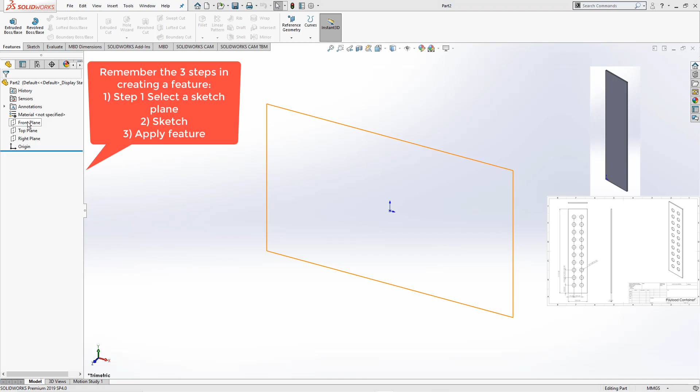Select a plane, normal to, sketch a rectangle out, make sure you sketch it on the origin.

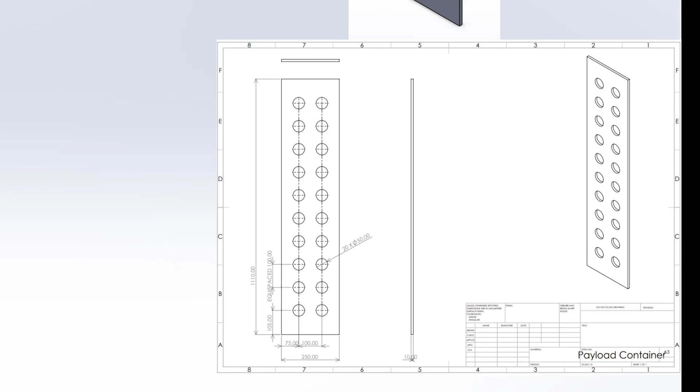Smart dimension the rectangle following the dimensions shown here. The thickness of the part will be 10 millimeters, the width will be 250 millimeters, and the total length of the part here will be 1110 millimeters.

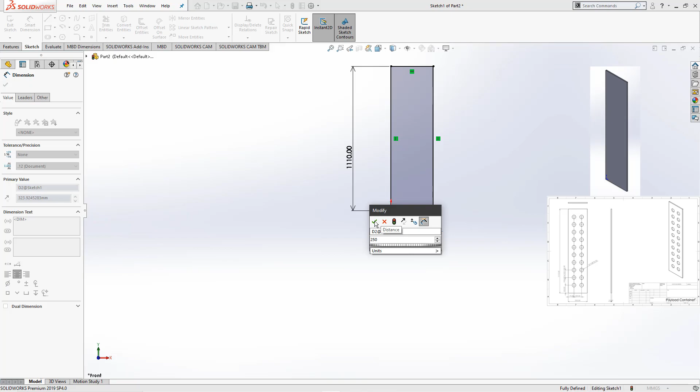So smart dimension, 250, and when you're done, hit the tick button. Accept.

Next, go to the Features tab, select Extrude Boss Base, and when it asks you to select a sketch, click the arrow button here, select Sketch 1.

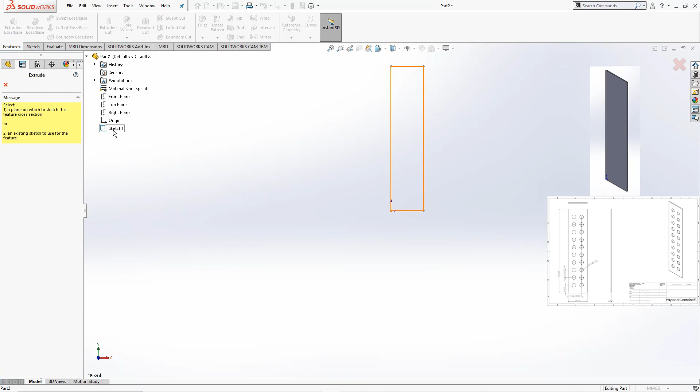By default, for mine the thickness is 10 millimeters. If yours is not 10 millimeters, make sure you change this to 10 millimeters. Select Blind, the default setting, and hit the tick button.

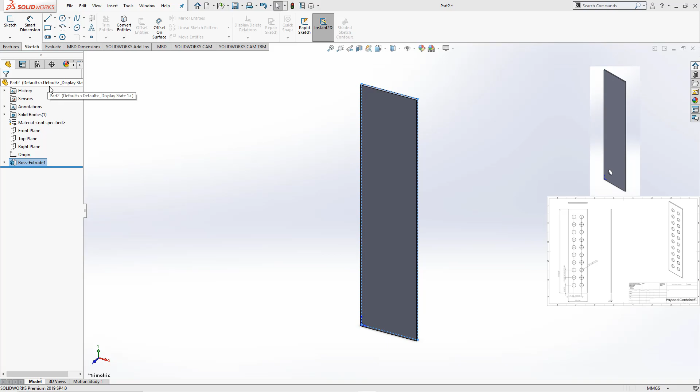For our next step, you'll like to create a hole on the part here. So what I'm going to do is select the surface of the part as the new sketch plane, right click, normal to, so that your surface faces you perpendicularly.

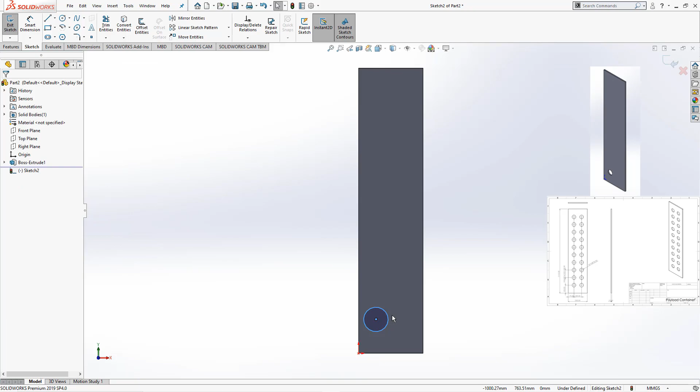Go back to sketch, select a circle, sketch the circle, hit the tick button, and smart dimension the circle following the dimension shown here.

First, let's set the diameter of the circle as 50 millimeters. The depth of the circle from the edge of the part is given as 105 millimeters.

The distance of the circle from the middle of the circle to the left edge of the part is given as 75 millimeters. Hit enter. Click on the tick button when you're done.

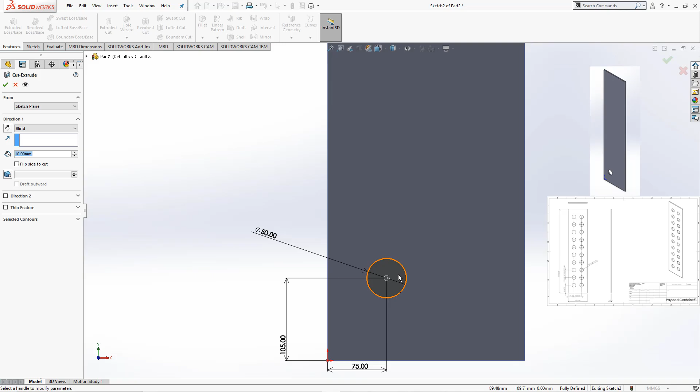Next, go to Features, Extrude Cut. Okay. This panel here pops up.

Just like the extrude feature, this setting here by default is set as blind. Blind allows you to control the depth of the cut that you want. For example, if I were to rotate this image here, you can see a preview of the depth of this cut if it's set at 10 millimeters.

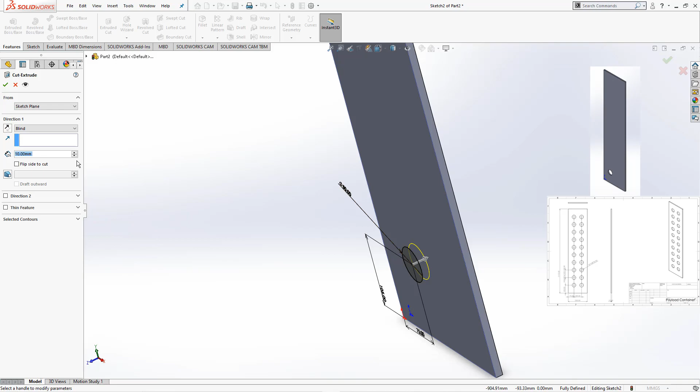If I set it to 5 millimeters, the depth is now shallower here. So blind allows you to select the depth by which you can select how deep you want your hole to be cut. But in this case, we want the hole to go through the entire part, the entire board.

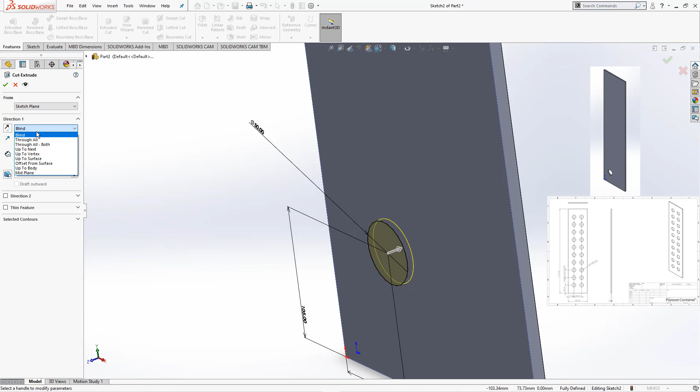So what we're going to do is, instead of selecting blind, click on this arrow here, select through all. What it does is that it will cut a hole all the way through. Alright, and when you're satisfied, hit the tick button here.

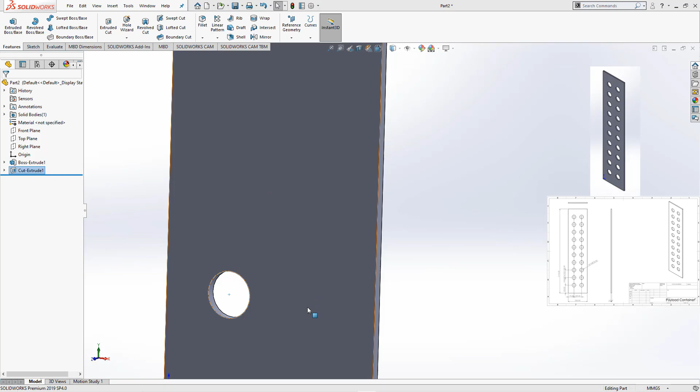If you look at the detailed drawing here, you will notice we need to sketch 19 more circles and extrude cut 19 more holes. We can repeat the process of sketching each circle one by one and then extrude cut. However, let's be more efficient, especially when creating parts.

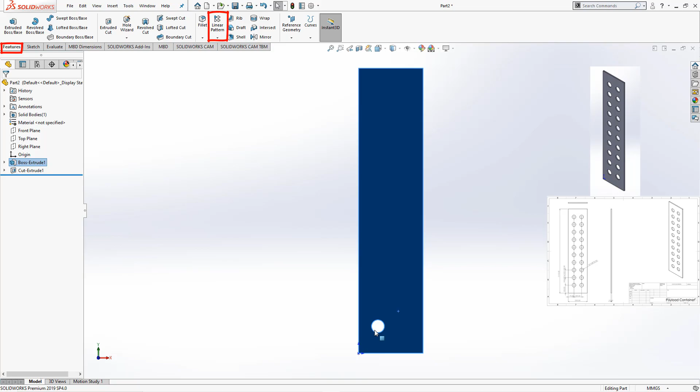I'm going to normal this part to my screen. Under features, there is something called linear pattern, and linear pattern will allow you to actually copy the holes in a linear pattern so that you don't have to create each hole one by one.

Click on linear pattern. This panel here pops up. You'll notice that there's a direction 1 and direction 2. This allows you to copy the linear pattern in two different directions.

For example, I want to copy this hole here in the X direction and also in the vertical direction, or the Y direction. So let's start with the X direction.

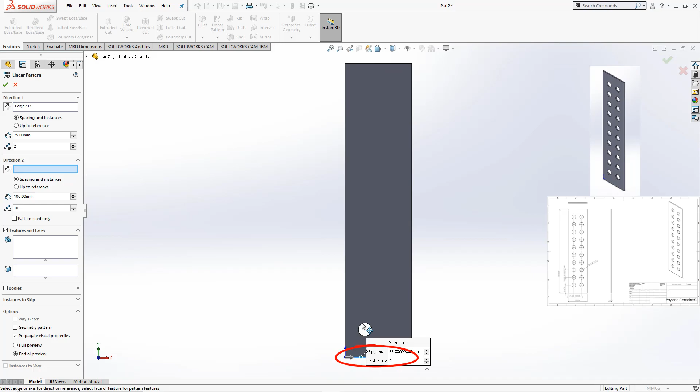So select on this box here, to indicate which direction I want it to be patterned. So I'm going to select on this edge. It could be this edge as well, but let's select this one here. Alright, this allows the hole to follow parallel to this edge here.

And the next one here, the gap in between each hole, just have to follow the detail drawing dimension shown here, which is 100 millimeters. I need two holes. Okay, so by default mine is selected as 2.

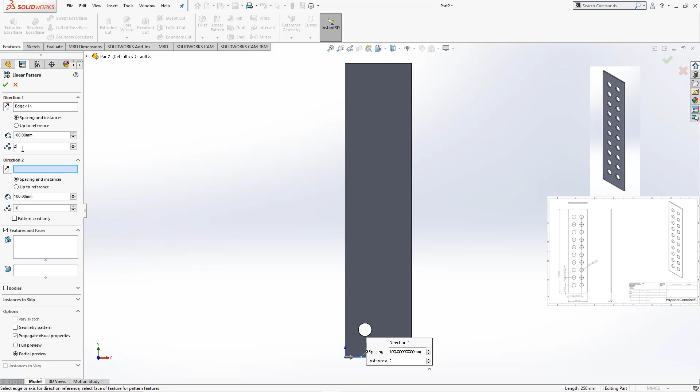For the next one, for direction 2, we want to copy in the Y direction or in the vertical direction. So I could select either of these edges for the circle to follow to be parallel with. So let's select on this edge.

Again, the gap is 100 millimeters following the drawing here, and we need 10 holes. Okay, mine is at 10. If yours is not at 10, select this box here and key in the number.

Alright, under features and faces, what you like to select next is obviously the circle, the cutout of the circle. So what you want to do next is click on this arrow here. If yours is not open, select cut extrude.

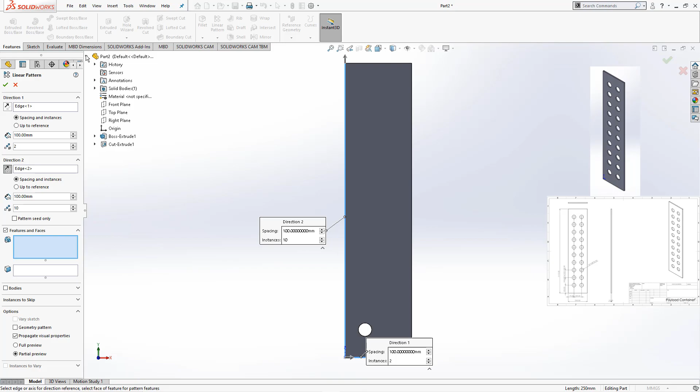Okay, and by default mine shows the circle to look like this. This is a preview image. Okay, you can rotate to look at it.

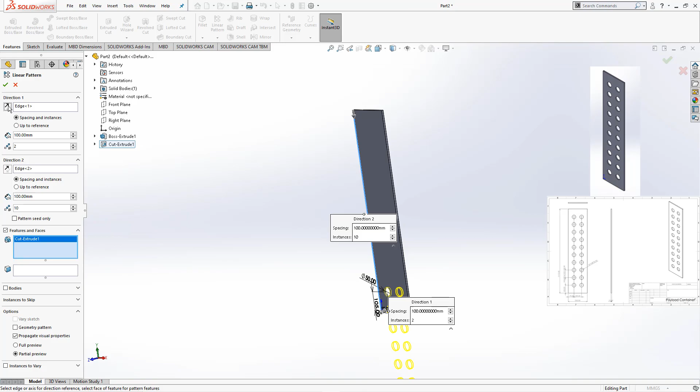If yours doesn't look like mine, or it's something like this, it's outside the screen, what you can do is click on this arrow button here to flip it so that it goes back into the part. Alright, when you're satisfied with it, hit the tick button and you're done.